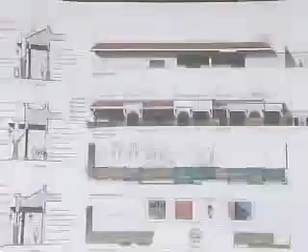Item 2, study refinement to the cornice of the parapet cap to reduce its overall overhang. Do you want to go over that? Let's see, how do we address that? Study refinements to the cornice at the parapet cap to reduce its overhang. Was this, did we make any changes to that? Did we refine that detail? We did on the construction documents, but not on this. Okay. Let me just go through all the minutes and then you can do a little presentation.

Because what we're here today for is that you're now going to have 3 tenant spaces instead of 2. That's correct. So item 2 was the cornice of the parapet cap. 3 was the height of the side openings are to match or be lowered to the front of the new entry arch elements. 4 was to study the height and color of the awnings and provide colors for the materials. 5, one board member finds that the roof over the arched entry element requires further study. 6, clarify and provide landscape details of the existing and proposed plantings for the areas shown in solid green on the plans along Milpas and Montecito Street.

So do you want to, how do you want to do your presentation?

I'll let Keith take the mic on this one, just to give you a simple overview. We had one tenant space the last time, and now we've split them into two, so we now have two entrances. And so we changed the plan.

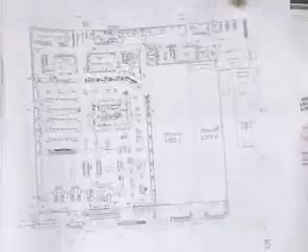Everything that was at the front, where we had at one point in time one ramp in the center, and now since we have two tenant spaces, we created a ramp in front of each one of them and added an extra arch. Actually, let me go back to this real quick.

Originally, what we presented the last time we were here was very close to this, except we had 3 arches. This being the main entry for the Fresh Market. This is our secondary entrance/exit, and this was our tenant entrance/exit.

We're trying to keep a very similar elevation, so we kept this archway. We now have 2 - we need the flexibility to have 2 tenant entry points. So these are our tenant entry points, keeping that arch.

The opposition to this would be to add 3 arches, and we want to keep as close to that original elevation because we really like that elevation. We think it works well. We've already been approved for that elevation, so that's why we came back.

The only real difference is that we've added a parapet on these 2 sides to allow an entry point here with storefront, entry point here with storefront. This archway is still at the front right here, and that's your entry point for our 2 tenant spaces.

Okay, so the archway has a wall behind it? The archway has a wall behind it. It's actually landscaping underneath, so we would have the same architectural detailing above, and we would have landscaping underneath.

The planters added then? Yeah, yeah. So this cream-colored wall that's right here is actually back at this plane? Correct, that's correct.

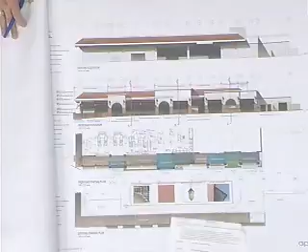And that's all. So you're right now doing construction drawings. You were given project design approval. Were you to return back to full board or consent? Do you recall? It's not noted here, so I'm going to say it was full board for your construction details.

It was my understanding that we were coming back today. We would present, hopefully get approval for the 2 additional entrances. And then we would come back a final time for full design.

Yeah, okay, it's returned back to full board. So then any of the items that are on the minutes that you haven't addressed, we'll just roll it over to the next time you come.

Now, would that be full board, like everybody today? I thought we were just going with one person. That was our understanding.

Oh, here it is. Actually, it says here, project design approval and continuance indefinite to the full board with the following comments. So really what we're going to give you discussion today is that the two entrance concept here is fine, and then we'll come back with the rest of the information.

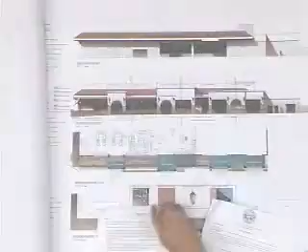Unless, have you addressed the height of the side openings and all that kind of stuff? You ready to talk about that? We did already on the CDs, not on the [elevations].

Okay, then we'll just roll those over. So we'll just talk about these two items and then move on to the next meeting. And then for the next meeting, if we need to just talk to Tony about this, we can. But I guess we just need to find out if it's contained in our construction drawings.

Do we just pull those sheets for the presentation, or do we have to actually update a rendered elevation for that meeting? I would believe construction drawings would be sufficient enough.

Okay, so with that, do you have anything else for your presentation? No, I did bring a sheet. They're not completely finished yet, but it does cut a section through here showing that this is closed off, giving you that condition of how it's closed off on the archway entrances.

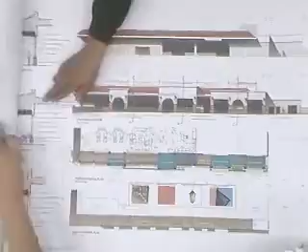One comment - how are we going to close off the return here? I would say let's just address it at the next meeting. So with that, I'll open up public comment.

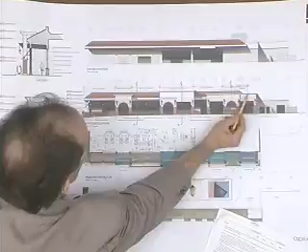Another question, Mr. Chair. This obviously returns back to the building right at the column line, and then this is also a corner of the building, is what we're seeing. That line right there is also a corner. That's correct, that's an existing stucco band. But it looks like the parapet height is slightly higher than this. Is that your intention? There's a ceramic tile band running above that stucco band, and then a cap, parapet metal cap, painted.

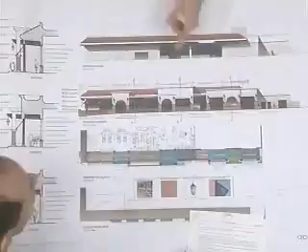I have one question. We had one board member note the same plane. Going to add to that real quick - this is that loading dock area in the back, and that's that existing corner. So that kind of shows how we're stopping a little short of that wall right there. The column sits right here, then the landscape wraps it, aligning with that edge of the building.

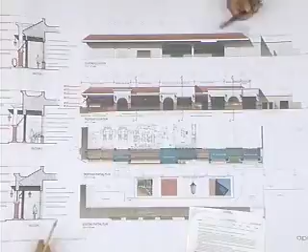I see that. And this is horizontal metal? Is that what that is? Split face CMU block. All right, and you're plastering over it, is that what that's showing? No, we're not, we're just being painted. That's just to show the paint. Okay. This is being plastered. So this would also be split face along here. That's correct, existing.

To clarify, is the elevation correct or the plan correct in your final intent? The plan is correct. Yeah, it's just this pop out - it looks like a pop out, but it's not actually popped out, it's all on one plane. So there's no line edge here. Correct, there'll be a line there just as a score line, a control joint. Oh, it's a control joint. That makes sense. But visually, you can't see a control joint from a distance - not very much, very single line.

I had a question. On the minutes, it said one board member finds the roof over the entry arch element requires further study. Did you make any changes to this arch? Was this the arch that was made reference to? It wasn't, we did not. It was this roof element, not the arch itself, that I was asking for some study. I just wanted to see if that was the only one, because I don't remember exactly what it was, but this is where you would like to take the project. Yeah, we feel just in looking at that whole composition, how the signage fits in the field, how the arch works, we really feel that this is kind of our best design. We feel very comfortable and are happy with that design.

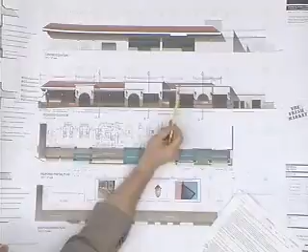For example, this one could be a little higher. Maybe this goes up just a little bit more. Maybe this comes down and this plaster meets the existing plaster height around the side. I think there's a number of options that could be considered there, to get some kind of more differentiation in terms of the overall surface and column arrangement.

This forward, that's how it's showing. I don't think that would really affect our plan if we were to do that. That's just my view. But I'd like to see the side view in order to understand exactly what's going on and how this connects with the existing building.

Those are my comments, thank you. Comments, Stephanie? I'll jump right in and say that I somewhat agree with Kirk in that I do believe there should be a change in plane at that location, and the solution you've come up with is pretty strong. However, I wouldn't encourage you to go any higher with these elements, but some sort of different treatment of them, perhaps this middle one, to differentiate it and also pull it forward would be helpful to alleviate that linearity. And I'm a little concerned about the fact that you're not treating the split face block there, or the texture of the face of the building.

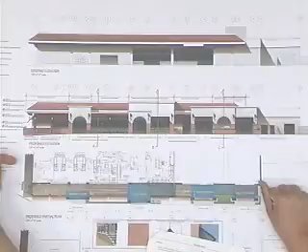Okay, and what about the side that faces Montecito Street? There's trees all around there. We're just going to paint it. Again, how you turn that corner and treat that corner will make a difference. If you stucco it here and then stop, and then it's just split face effect, that's going to be a little awkward.

So I'm just saying, come up with some solution for the next time you come before this board. Okay, that's a great comment.

Discussion from anybody else? I missed the original review, so I'm abstaining from comments.

Okay, Kip. Let's say now, I still can make comments, right? And should I limit to the front, the two elements, or should I? They're in the process of doing construction drawings for this design, so if you have anything that they can use to take this design further while they're doing the construction drawings, that's one comment. The other comment is what's in front of us today, which is these two things. They're not going to alter this design significantly, but as they refine it, you can make some comments.

The project received conceptual approval? Project design approval, yes. Which one, conceptual approval? The next one. Preliminary. It did receive preliminary. So this is final. No, this isn't final. This is in progress because they made a change to it, because they now have these two entrances. But the comment from the last meeting was to address the front. And they basically said that they're happy with the way this solution was. They studied it and they're going to stay with what they initially had.

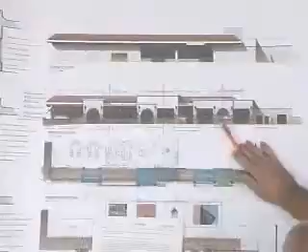I think that this element right here, which kind of looks like an entry element, is all decorative, and I think these columns are a little small width-wise for this to be the same plane, and I think it would be better if we just utilize the canopies to do it.

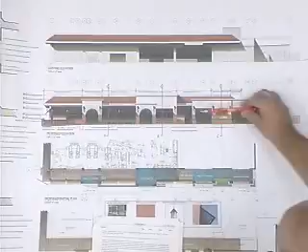Not have this thing in the center right here, and make these columns a little bit more like they're going to carry that load. That way I think the options are better, and it's not in conflict with this. So it still looks to me like there's 3 units, and they're splitting it, so it looks odd to me.

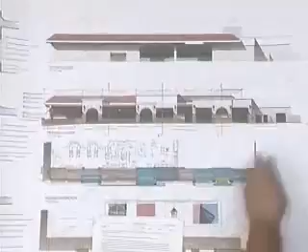And I agree with Stephanie that this trash enclosure should be plastered, as well as this wall and part of the turnaround, at least to the trash enclosure, should be plastered.

Before you talk, did you understand what Kirk was saying about varying this plane by pulling this up forward, which they agreed to, and the second thing Kirk was saying is perhaps changing this parapet or changing something here to give a little bit more variation.

I think that would also be a solution, but as it stands right now with these smaller columns on the end and the domination in the center and it being all the same plane, I'm having a lot of problems with it as it is.

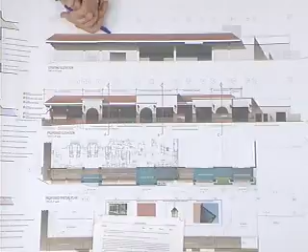So they won't be coming back with it the way it is. As a whole, I think it needs study, not just this portion of it.

Okay, Howard, did you have anything else to add? I pretty much agree with what I've heard, and also I have not seen this project before, so I'm going to abstain.

So, Tony, did you have something for us?

So Keith, do you want to add anything before we do a motion? Just real quickly, I understand what you're asking for about termination of the stucco. The one thing I wanted to point out is that this is approximately 90 feet back from this face. So I understand what you're saying, but my concern is we'd be plastering a facade that is extremely far back from the front entrance. It would be, from our perspective, a high cost for something that wouldn't have a huge architectural effect, because it's so far behind.

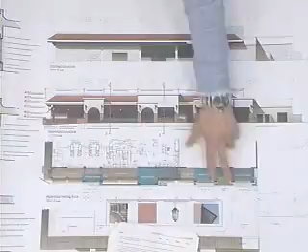The suggestion is that we need to refine this plan so that it matches, and when we come back for our final presentation, it will be changed, and we'll look at further development of that as well. And these columns here too - they could be beefed up to be as wide as they used to. They do look a little thin. That was actually a good eyesight catch.

So if someone wants to make a motion, or I'll float a motion and see if everyone's in agreement. The notes I took were for the applicant to study the new entrance elements and to vary the parapet heights and/or the facade treatment. So there's both this direction as well as this up and down stuff. We're not giving you 100% direction, but just in the sense that you need to do something here, because what you have in front of us isn't working. We have one solution that was mentioned, and then Gary was talking about some other options.

Okay. The second item was to bring some additional information about the side views and how the plaster is going to be terminated as you turn the corner. So if you're going to go 1 foot, are you going to go 10 feet, or are you going to go 90 feet? And then if you want to show some photographs from a different part of the parking lot, you can make your case.

But right now, we just don't want a clean line or look like what we didn't touch. So come back with a solution. And I would say on both sides, how the stucco over the CMU block is being terminated, and provide additional information about the side view.

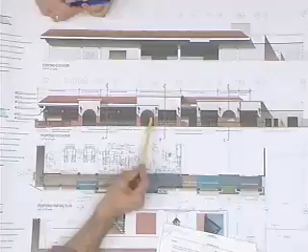Part of the reason for wanting something else done with the roof over this main entry was because, as was pointed out by Tip, the height between the top of this arch and the parapet is weak compared to what's happening here and here. So it's like you're taking the most prominent entrance and giving it a kind of weakness by doing that. I think something needs to be done there. There are lots of options, but I think we should keep that item in there.

And I want to comment on that item a little bit too, on the motion. Okay, wait one sec - why don't we just add item 5, but say two board members find - or just say some board members find that the roof overhang... I'm fine with that, keeping 5 in. Keeping 5 in, okay? And Chair, I know cost is a big issue, like everything we do in life.

Personally, I think if you get rid of that element completely, you'd have a much more successful elevation, so you're not conflicting the front and the back. I think maybe you tried too hard on that front. So just look at that and see how it looks.

Did you mention thickening up the columns? No, but I'm hoping he'll remember. Let's add that to the motion. Item 4 would be to have the column width match throughout the front elevation on the new tenant spaces - which he's taking good notes on. Any other discussions?

Before we take a vote, one comment: when you come back, don't come with 100% finished construction drawings. Come back with an in-progress set in case there are a couple more tweaks, and then we'll have you go to consent, which is the final version. But if you have all your engineering and everything 100% finished and we ask for minor changes, it might cause some heartache. So just make sure all the details included on the elevations are included in your set.

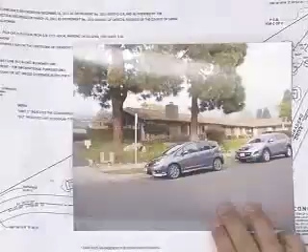I've taken perspective photos from the side, and there should be some close-up photos of the damage. So we're just looking for the photo of the existing condition, and then we'll look at a photo of the proposed solution. Here's one from across the street, and here's another from a different angle, and another. I want to keep them all so the TV camera can zoom in, and then I'll pass them around to people. Oh, I'm sorry, got it.

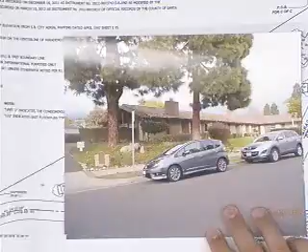But we're talking about this area right here, where this trellis is. Is that what we're talking about? Correct. So here's another view of it. It's the trellis at the end of the rake. Correct.

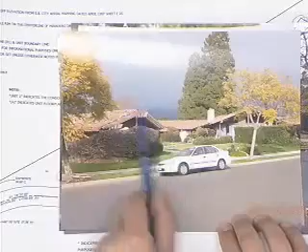This is a good photo here. You have a good photo? Okay, so this is the current exterior condition. Correct. So you pass these down, look at them, and then pass them down. And how would you like to proceed?

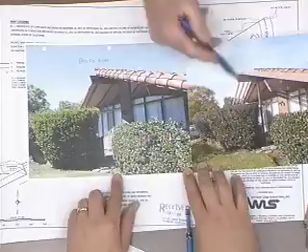What's the proposed solution? You had a mock-up. The proposal is we have some photos -- no, that's what we would propose the final look to be. What we're proposing is removing all the trellis members themselves, cutting back the 3 support beams at the end to about 8 inches from the rake, and then putting a metal cap back over that exposed 8-inch top, eliminating the trellis members and the exposed beams.

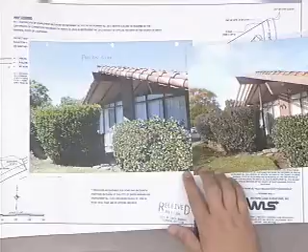The letter is rather verbose, but 6 years ago we spent over $100,000 refurbishing these trellises, and we're back in the same boat again with dry rot and termite damage. The community has voted not to spend the money to replace them all. We gave them the option to take them all down, and the vote was essentially to remove them. So what we're proposing is to do that on behalf of the association. All righty.

That's all from the presentation. It sounds good.

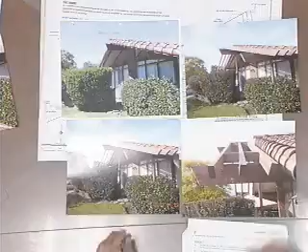Okay, and what is the relationship once the beam is cut to where that column hits the beam? Is it right at the end, or is it held back a little bit? The supporting beam will be back a little bit - we're going to leave 8 inches at the top of the column support beam. Okay, and then cut at a 30-degree angle, and then this 4x4 that supports it will be back just a few inches behind it, 3 or 4 inches at the most. That's all, yes.

Okay, I got it. Sorry, go ahead, whoever wants to be next. I have some questions. Are these 4x4 posts part of the original design?

Or were they put in there because the ridge beams were sagging? No, they were not put in there because the ridge beams were sagging - those are the original design ridge beams. So the ridge beam, this is a fairly deep beam, is cantilevered quite a ways out. Yes, and it was intended to do that without any support. No, those were original design. It was determined which ones were so far out that they structurally needed support.

On some of the units it was determined there is not enough weight on that cantilever, so they did not need the beams. So here's another little technical question - does the association own these pieces of wood, or does the individual condominium owner not own these? Correct. So the letters came from a condominium owner, and that person said there were a lot of people who were concerned about this, that it would change the look of the complex from what it is to a new look. Yes, it will - that's why we took a vote. Right, we actually had a vote.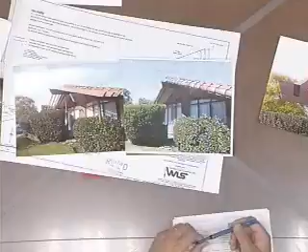So, cutting this off altogether on the north side of a structure, one of these buildings - might that offer more light into these units? I'm not sure where the person is who lives in this complex, which side they're facing. If the reason you're going to extend it is because you really do like the shade this provides the condominiums, or is it simply a maintenance issue?

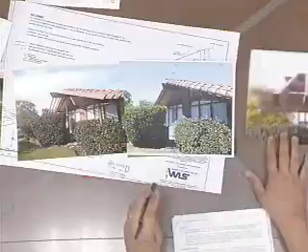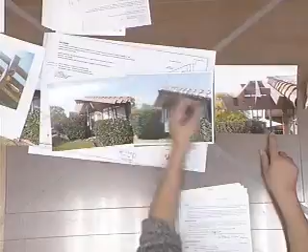I think I want to answer the question. I believe our proposal is he's cutting all of this off to this point, and where this column exists he will keep it, but this column doesn't exist on all of them - this trellis is coming off on all of them. Oh, I thought they were going to take the trellis off but put tile over it. No, you're not - he's just going to wrap the tile like it is here, using 8 inches and a 30-degree angle, so that little look, and then this middle cap will be placed back over here.

All of the overhangs will be significantly reduced, uniformly throughout the complex. Yeah, exactly, and three of them already have those off.

Was this picture the one, or do we have... no, this is a Photoshop thing. Okay, yeah, three don't have it.

So what, are we cutting these off and moving this over? We're cutting this off, cutting that, and that's all. It would look similar to this. And as long as the column remains, the column will remain. Correct, because we don't want the whole thing to come back. Most of them don't have those columns, some have it and some don't, but where it exists, they'll keep it.

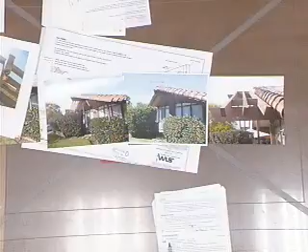So let's go to comments from the board members in any particular order. Scott, you're first. I look at a project like this, and I'm picturing it without the trellis. I think, is it an approvable project without the trellis? Is there enough architectural interest and character to approve it?

They're very simple buildings, and the trellis does add some architectural detail, but there is a lot of character in the buildings nonetheless. The roof has a great patina, the landscaping is very mature. I think there's enough interest there that the building can stand on its own without the trellis.

My only concern is the issue where the column exists and you're cutting the support beam back to a stubby little nose, and that's kind of a difficult condition. I think you need eight inches, perhaps minimum, of overhang at the column.

Just an interesting point. Now, I'm sorry, that's not for me to talk. It wasn't, but if you can be really brief, what he was talking about was the distance right here.

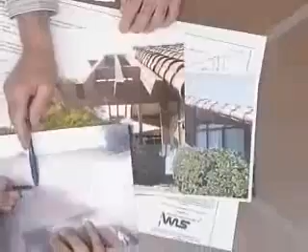There we go. Then we have those holes or whatever damage is left under there that we could fill. So eight inches is not set in concrete. We wanted to leave something because we suspect we're going to have damage in the future again from those things being exposed, so we'll end up just nipping back.

And perhaps you need a good copper cap and some epoxy filling. He said metal cap -- we're going to put a metal cap over it.

So let's go back to comments. Anything else? Those are my comments. Okay, great, anybody else? I pretty much agree with Scott.

I'm sorry to lose the trellis overhang because it really is part of the character of the development. I do understand that this is a maintenance problem. I wish there was money in the budget to properly maintain it. But I have to agree that the building will still have architectural merit.

And I do agree that the distance between the post and the rake at the end of each of those beams will be important. May have to move the post or maybe cut the end of the beam out. And to save yourself this problem in the future, just cap the whole thing -- cap the top, the end, everything. But that would be my comment.

Okay, great, any other comments from anybody else? Yes, Kit.

By the way, Mr. Miller, I read your letter and I really feel the pain of your association. I just spent $100,000 to maintain these trellises here, and personally, to me, I think they are an eyesore. They are an eyesore now, they were an eyesore initially in the new design. I love trellises, but I don't think they do anything -- they don't shade anything, they're just out there for no reason. So I'm really glad that you finally cut them off and clear them up, and I think we have a much better project at the end.

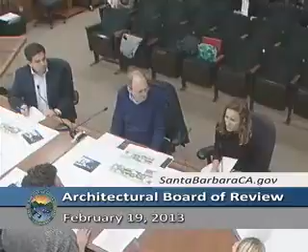The minutes from the previous meeting were... If you want to go through your presentation, or do you want me to go through the minutes? I think we can just go ahead and go through the presentation, because we actually do try to address the minutes point by point.

Just as an introduction for those who may be new to the project, in the audience and on television, I want to say a little about the background. This is an affordable housing project, ownership affordable to moderate income residents of Santa Barbara and workers in Santa Barbara. Primarily the kinds of workers who may be interested in living in this small development would be workers in the medical industry and at Cottage Hospital, that kind of individual.

I want to emphasize again that this is an infill project on property zoned R3, multiple family dwellings, and it's bounded on both sides by apartment buildings that are 6 units and 10 units respectively.

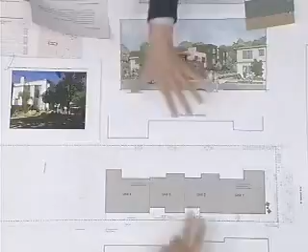We're proposing 4 units on a good-sized lot, as you can see, that has Mission Creek at the back of it. The buildings are moved towards the street and maintain a 25-foot setback from the top of the bank of Mission Creek. The overall density with the 4 units on this lot is about 11.76 units per acre, so it's hardly a high-density development. We do have three stories of building in the center of the building that you see in front, the 4 units.

As you know, the SD2 overlay zone permits 3-story structures within that zone district. However, there's a limitation on any 3-story elements: it's limited to 50% of the ground level area. Our 3rd-story elements, which consist of some bedrooms up over the central portion of the building, are less than the 50% prescribed.

One other point I'll reiterate from the last meeting is that we are asking for one modification, having to do with the setbacks. In the SD2 overlay zone, there's a setback requirement of 10 feet for 1-story buildings and 15 feet for 2-story buildings. In this instance, if you look at the pattern of development on the street, the typical setback for the 2-story apartment buildings on either side and all around the area—you have an aerial photo that shows some of that development pattern—is typically 10 feet.

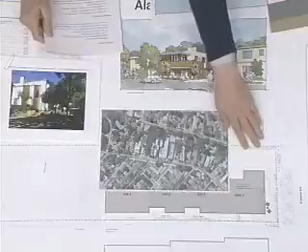In this instance, we have designed the building, and you can actually see it in this rendering, such that we cut away an area of a 2nd-story mass to create a deck. So the only part that's really subject to this particular modification is this little hatched area you can see on the site plan. That's the only area that actually moves to the 10-foot setback consistent with the rest of the neighborhood.

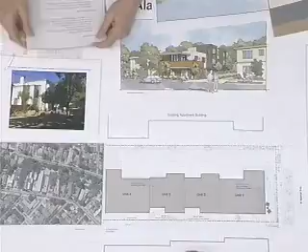Since the last meeting, we've done a little more work here. One of the comments we responded to—first, we wanted to create a 3-dimensional view, so you have a rendered view, and you can see we've done some work with the colors. I have a couple of variants to show you as well when we get to that, which you might consider as we discuss colors. But the main change we made to the building design itself is adding another material element.

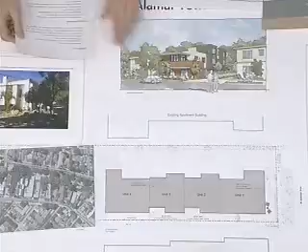You can see that here with the horizontal siding, which would be a cement fiber type board that clads and wraps around the front element, and then we use it again at these spandrel panels in the center of the building, and at the other end of the building we also have a wall that utilizes that material. Another thing we did is add a little additional overhang at the front, to the second-story roof. I think that adds a nice, deeper shadow line, and that was a good suggestion, a good improvement.

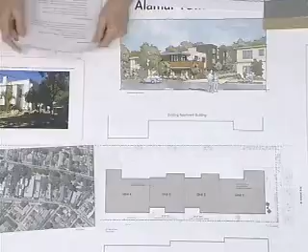What else have we done here? With respect to the windows, we understand you're not happy about using vinyl windows, so we've changed the windows to fiberglass with a pre-finished manufactured color. And then we selected our color to use in the overall color scheme.

And then there was a comment about why we were using some double hung windows, and we've replaced those with casement windows as well. One other comment was a question about what we're doing with HVAC equipment, and we've eliminated that from the plan altogether. We really don't see that we're going to be using air conditioning here at all.

So the only other thing before we finish, I wanted to give Bill McReynolds an opportunity to talk about the photos he has taken of the neighborhood and presented to you here. I believe from the last meeting there was a request for some additional photography. So there's 3 sets, each team has one.

In terms of the existing 3-story structure in the neighborhood, about 600 feet down, there's 3 pictures there. And then from the 2 adjoining apartments, I took pictures of the 10-plex building, which you have before you, kind of what they see existing. And then again on the other side, from the 6-plex apartment building. They're just in different sets there.

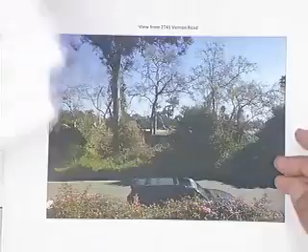Bill, this is the 6-unit apartment next door, is that correct? That's the house, that's the actual subject view house. The request was for the yes, from the 6-unit apartment.

Okay, sorry. So do you want to finish up? Finish up, and then we want some landscaping.

So with regard to the architecture, I just wanted to say something about the contemporary design style. I think there's a place in Santa Barbara for an opportunity to do a contemporary style building. We have some great examples of contemporary buildings in different locations in the city. This is certainly a location with a very eclectic mix of buildings, although further into the neighborhoods we have more single-family residences and more traditional styles. But right on this block and surrounding this building and across from it, we have these multiple-unit apartment buildings that are perhaps not classic examples of modern architecture, but they are certainly contemporary, simple design style. So we felt this is a location where it's appropriate to consider a contemporary style building, and the people we think will be interested in this are going to be younger professionals who are looking for a fresher, more vital look.

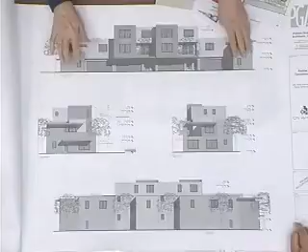So then you have this third story. This is a cantilevered section that's cantilevered about 5 feet out over the garage, and then the middle sections are cantilevered about 2 feet, I believe. And then at the back, once again, you have the main living on the ground floor with the bedrooms on the second level, and the mass modulates and steps back down towards the creek.

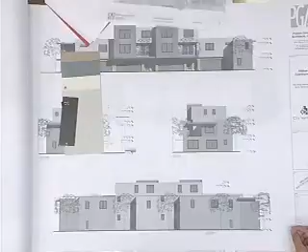So with respect to colors, we've come up with a couple of different schemes. This is the scheme featured on the cover page, and it takes that third story mass and uses this darker blue-green color, with the siding in a kind of wood-shaded color, with a couple of off-white and a warm gray.

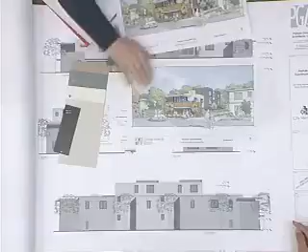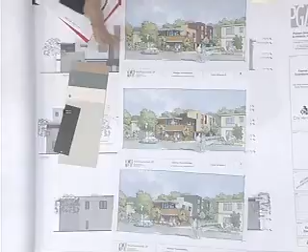And then we look at another couple of schemes here. Both of these use the same basic color palette, but we move the locations of the colors around a bit, moving from a darker 3-story portion to a lighter one, and switching to the darker color on the 2-story mass. So those are just a couple of different schemes you can give us feedback on what you prefer.

One comment I want to follow up on from the minutes: it said to study extending the depth of the eave elements and provide additional eave elements, particularly on the south side and other areas, to create additional shade lines and character to the building. Character-building elements would be variations to the second and third story roof heights and variations in windows or fenestration. We didn't get a chance to edit that, so it's a bit of a run-on sentence.

I wanted you to briefly say how you evaluated the massing. We took the initiative to change the roof overhangs at the front and the back. I think it's pretty obvious that the roof heights are modulated here. We didn't see much opportunity to add additional overhangs without really changing the building, although if the board feels strongly about it, we could consider adding something here.

So, want to look at the landscape plan? Sure, it's one back.

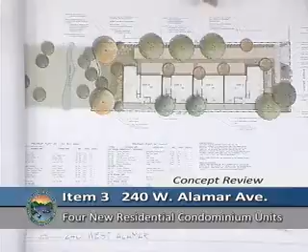At the last presentation, there were comments about incorporating fruit trees and espaliers into the project. I evaluated possible locations for espaliers on the walls, and we're pretty much limited to here, since the architecture did such a good job with windows and modulation that this is really the only blank wall available. We will incorporate vines through the project as well. As for fruit trees, all of these small orange-colored trees have the option of being citrus, and we've listed the improved Meyer lemon.

There was also a comment about incorporating oaks throughout the project. All of these smaller symbols are the 15-gallon saplings required by the city as mitigation for removing the small oak existing on the property. We've also incorporated the option of including oaks here and here, and the street tree within the parkway is required to be an oak.

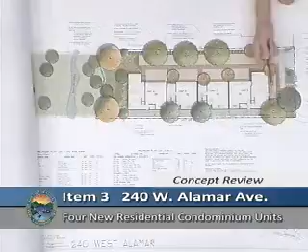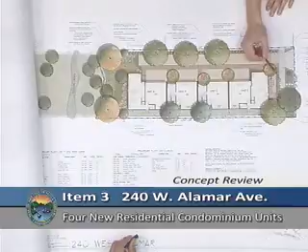I worked with the colors a little, and I feel this feels a lot better than the last plan. We also changed the ramp configuration, so that's a lot cleaner now. There's a small gate that opens this way, allowing more planting in front of the low courtyard wall. Instead of the switchback we had before, it's a slow ramp up to the front door, and they still have a small patio space.

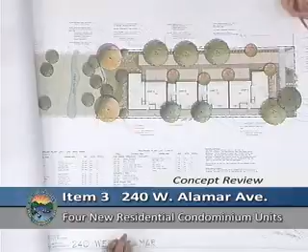The last thing we changed was to incorporate pedestrian wayfinding through the driveway. We'd like to still use concrete, but with a contrasting color and texture—maybe a heavy seed, some kind of stamp, or just a textural difference that gives it a sense of 'this is the way to go.' We'll use tans and browns, the Santa Barbara traditional colors for the concrete.

Anything else to your presentation? That's it, I think that's it.

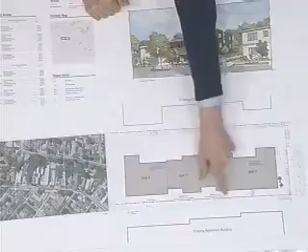So unit number 1 has a private little patio in the front yard there, but also a side yard of 6 feet. But primarily the larger outdoor living space is on the second floor in this deck here. Same thing applies to unit 4, so you have the 6-foot side yard and then a substantial deck on the second story. For these units, you have an enlarged ground level space that's 10 feet, looks like about 12 feet or so, as well as a portion of it being the 6-foot side yard setback there as well.

So the private outdoor living space is in conjunction with the garage and the stairwell. There's, let's go to the floor - that's in the middle units. Yes, in addition to the deck space. In addition to that, the middle units also have a balcony overlooking the driveway. Yes, right, private outdoor living. Okay, correct.

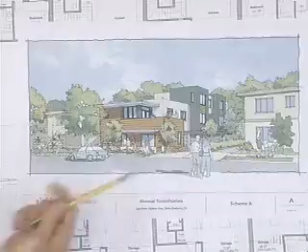I noticed on the rendering it looks like, in addition to the siding, you've got a kind of plaster detail at the window. I'm just curious what that's going to look like. It didn't look like it was differentiated yet on the plan—is it a pop out, a recess, or just a change in material?

Yeah, just a change in material. There'll be a little bit of a recess there. It doesn't really show up in the plans because it hasn't been detailed to that level yet. But the idea is that this window and the structure around it is meant to be a differentiated piece that sits within that plane. That's the idea behind it.

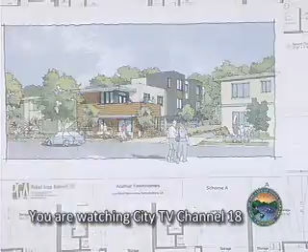And then I think last time you pointed out that the eaves are plaster and there's a metal fascia. Yes, and the underside—it looks like you're proposing that light lime color, or what do you have? Yeah, we're kind of still debating that, but the idea is that it would be a lighter color on the underside there.

Okay, and then this looks like another color. This would again be this. Oh, it's the lime. Yeah. Okay, and the garage door is painted the same. Yeah. And then also it looks like—

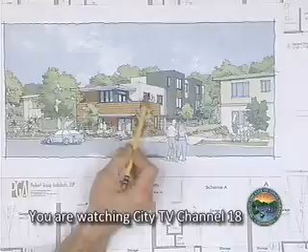except, or maybe in addition to, there's some kind of recess there at the windows. Is that a plaster return with the window recessed? Right, the windows will be recessed. The walls are 2x6, so it gives us the opportunity, by pushing the window right in on the inside there, to have the plaster return and get a sense of a recess.

And how would that work where there's siding there? Would it be something different? In those cases, we're going to have a very thin trim piece that surrounds those windows as well as the corners. Okay.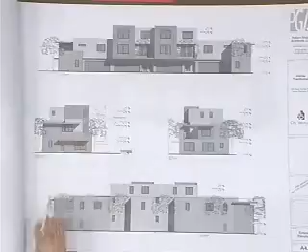I was just—one of my comments last time was my concern about the impacts on both sides to the current residents of the apartment buildings. On this side, because of the driveway and lots of differentiation in the articulation of the architecture, I think it's working fine. On this side, I still have a concern, and what I was just noticing—this is a question—is that there's a stairwell going from the second to the third floor in here.

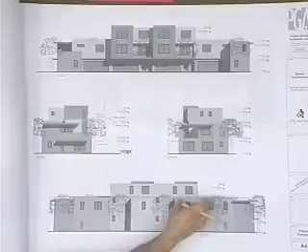That means that perhaps there could be a break in that third-story roof in a couple locations. I think there's another one happening here. So I'm wondering if there's some reason we can't do that, and also whether we couldn't do something like a projected eave on this, or some of these two-story areas, to get more happening on that side. I think those are things we could look at for sure.

All right, I think those are my questions. Thanks. All right, who wants to jump in next?

No, we are still in questions, and then before we go into comments I've got a couple things to add. A couple of questions. One, the plate height—what are the plate heights of the first, second? Nine, nine, and eight. So nine, nine, and eight.

Okay, and then in the front yard setback, how much of that front eave is closer than the 10 feet? How big is that eave? You mean that little projection that comes out? I believe it's not grounded, right—it's just a projection coming up from the wall. I believe it's 3 feet, that's a 3-foot projection.

And that is not included in the modification? No, because it's allowable. I noticed it's not in that hatched area. No, it's not—it's allowable. You're allowed to have projections of eaves into the setback.

Okay, so on the first floor, Gary, it's 3 foot 2 inches, if I'm getting this right, and then on the second floor it's 2 foot 7. All right.

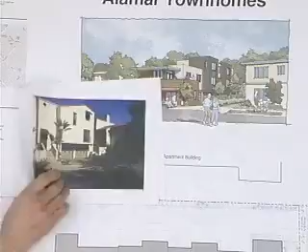And I just wanted to also point out that, because we had public comment to the contrary, that as was presented, this is 600 feet away at the corner of Talon Road and Alamar, and you have three-story facades that are just visible from the street, directly visible from the street. This looks like it's maybe 15 feet back, and that's a three-story wall going straight up, unarticulated. So this is not setting a precedent. There are precedents already in the neighborhood.

So, the way that it's been carefully designed, I'm completely in favor of the modification. I think it's clear that on both sides of this property we have two-story flat facades, apartment buildings that go up, that are 10 feet away from the property line. And this has a much more modest second-story element that's very nicely detailed at the second floor. So to me, the modification is completely appropriate.

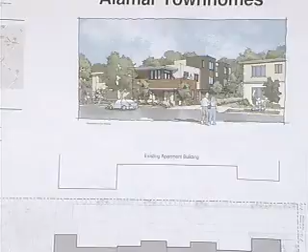Just as a general comment, this is more of a detail thing. From the rendering, it looks like the base of the building is a darker color, and I think that works well as a kind of underlying base for the building. I think also that the eaves, perhaps, should be a darker color rather than a lighter color. Just something to throw out there and maybe look at. Those are my comments.

Stephanie, broad brush.

Broad brush is that I'm kind of agreeing with Kirk, in that the way this building steps up from the street goes a long way to camouflage its height and mass, bulk, and scale. And looking at the site plan, it really fits almost similar to the buildings on each side of it, in a similar way, and within its own property line. There's enough space around it to make it a comfortable siting of this building.

For me, I appreciate the use of the siding along the front facade, and would agree with Kirk on the colors. I really love the green color, and I did not like the other colors proposed. I think it's very much in keeping with the character of the neighborhood, and would encourage the applicant to look for more ways to incorporate craftsman details into the building to warm it up, with perhaps some texture on the eaves. Kirk was saying a color on the underside of the eaves, but perhaps a texture as well. That's it.

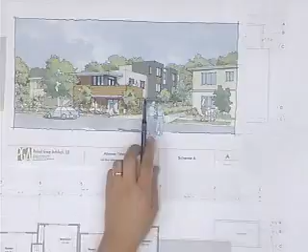The one thing about the size, bulk, and scale that bothers me the most, and it's just more of a visual thing, is trying to understand what this 5-foot cantilever is going to be like when it's 2 stories up. I'm looking at the table length here, and this is about 42 inches between me and you, maybe 4 feet, 48 inches. A 5-foot cantilever, and then the second and third floor going straight up, just seems to me too tall of a mass on top of the garage. I looked at the photograph of this other 3-story building, and it seemed, I'm not sure what this overhang is, whether it's more like a 2-foot overhang versus a 5-foot overhang. So that's where I'm starting with size, bulk, and scale visually, trying to relate to this comment that I'm thinking this sticks out too much.

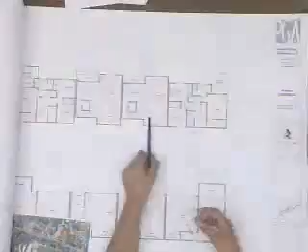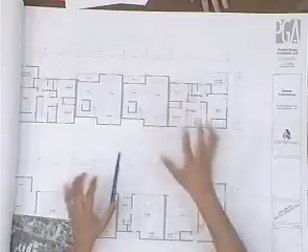Staring at the floor plan, what this zone is, this 5 feet, is just extra living space, and you've got a kitchen here, and this is a modest, affordable housing project. You've got the dining room here. There's room that this square footage isn't required to make the house work. It isn't like it's the extra bedroom or the closet for the bedroom. Bedrooms up above, though. Exactly. So I'm saying this doesn't need to be here, and that's going to alleviate a lot of that looming mass. Because yeah, it's 9 feet up, but it's taken 5 feet out from the ground.

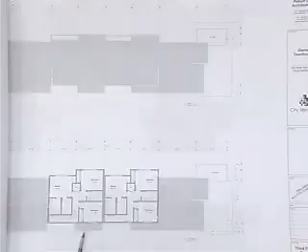And then the coloring of the thing, thank goodness it's not black anymore. But still, the green here, I mean that's a nicer green than this, but the Lego block that's plopped there seems very heavy. Visually, size, bulk, and scale, from my perspective as an architect, it's not working. Everyone's commenting about the architecture and the playfulness. On the upper floor, what I'm sensing, I know you're trying to do your demising walls, but goodness gracious, if that could just rotate over here, you could have a little bit more relief. I'm just sensing it's overhanging too strong. The other thing I sense has to do with the architectural character.

I see this as kind of a modified Frank Lloyd Wright-ish kind of stuff, or it's got a certain look. This has a certain look, and they're not the same. Kirk keeps mentioning add more overhangs and try to bring some of this character and articulation somewhere else, but somehow this is too boxy, blocky, Irving Gill here, and then this is Frank Lloyd Wright horizontal with overhangs. It's like this was an addition to this structure.

So that's my point coming from size, bulk, and scale - it still appears large on the site. The character of the architecture, as long as it was homogeneous and had a flavor - you've got the 1950s modern, whatever they call it these days, you have a choice - but these two are separate from tying it together. That's visually just how I perceive it. So architectural style and size, bulk, and scale, I'm not seeing it yet. The third story element is not a problem as long as the massing can get rotated or lessened, but that overhang is bothersome.

So at that point, how do we proceed, and where would you like to go next? I think at this point we will probably have an indefinite continuance because we're going to get feedback on the PRT, and then we may go forward to the zoning administrator hearing with your comments, and so when we come back, we'll have refinements and kind of incorporate some of the ideas that you brought up.

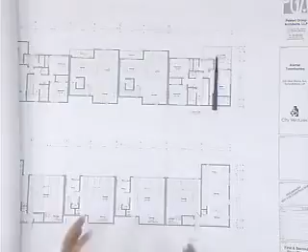So what we can do, I asked for comments broad brush, if we can just quickly go through and comment about the requested modification so we can have that in the minutes so he can go on to the staff hearing officer about this one element. I'll add my comment that visually we're supposed to look at the aesthetic impacts. Because there's a negative space here, this encroachment over here I want to say basically balances, plus the way that architecture works with the horizontals. I'm not losing sleep over the aesthetics of this requested modification, and it's because of the negative space that's next to it. But if other people want to chime in, we can add that to the motion.

Excuse me, Mr. Chair. For projects that go on for a land use approval at Planning Commission or Staff Hearing Officer, we ask you to do the project compatibility analysis in the minutes. Well, I don't think we're ready for that at this point. I don't think so either. So then you won't be able to go on to the Staff Hearing Officer to address this issue until after you get your creek and your DART taken care of.

So scratch all that unless, for the record, if people want to just comment on what they feel for the requested mod - Kirk already has and he's in favor of it. Correct? Yes, I'm in favor of the mod. Okay, I'm not in favor of the mod. I think it is too close, and with the eaves, as I said before, I think it's just too close in the outdoor living space. I think it's too close to the front. I don't think there's a need for the mod.

Okay, perfect. So now, how would... I'm just going to say 3-2. We don't need to take a straw vote, we just have the feeling of the board. So if we can tidy this up and just make it an indefinite continuance with the comments from the board. And that's appropriate. We'll come back with Mr. Chair - I think it seems like it would be helpful to the architect if he had a better sense of the consensus of the board regarding the cantilevers. If he's not able to do those cantilevers, that would make a big difference.

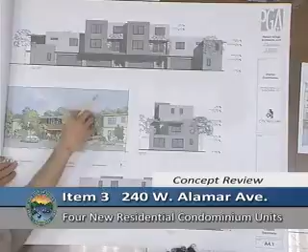I don't have a problem with cantilever either. I just want to add one other thing, because I really appreciate Paul's comment that if even some modest addition, like little pop-out eaves, was added to help tie these two together, I think that would really help. I think that's a great suggestion.

So who would like to formulate a motion? Could I get an idea of how the board feels, a straw vote on the size, bulk, and scale? Because I think a number of us still feel the project is large. What did Tip say? Tip is fine with it, so I'll just say it's 3-3. We're split down the middle.

Unless you want a formal straw vote, I think it's fair to say some members of the board feel the overhang is okay and some are not, but it's a divided board. On the overhang there's less concern, but on size, bulk, and scale, it's divided.

I think your comments about the style, the fact there are two different styles playing with each other—I don't know if that's a good thing, if it's eclectic, or if it should be made one or the other. The comment is valid. I think the discussion they had about adding to it is a good comment. I agree with your comment on that, Paul. I didn't see it, but thanks for pointing that out.

I think what we really need to concentrate on is the big picture, and the big picture is the size, bulk, and scale of the building. At 3-3, it means to me it's not there yet. I would say some board members have a concern about size, bulk, and scale. Let's leave it as some, but in reality it's a 50-50 split.

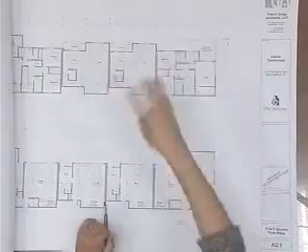We're having a good discussion here. Howard's point of view is that this space, 10 by 10, is not really part of the everyday living space. Whereas this space over here, off the kitchen, you can actually do stuff on that outdoor space. Here, yes, they provided it and statistically it meets the requirement, but if they had more of an outdoor space here, or even on the third floor, related to some living area, they would go out there and use that balcony more readily than having this space that's just going to store bikes and trash in the back—it's a dog run. That's where his concerns were coming from when he's studying this. He's saying, if I own this unit, I wouldn't be using this space that much.

So if we can just say, look for opportunities to provide more outdoor living space connected to the homes, to the living areas of the home. All right, okay.

Any other discussions on the motion? I have one minor disclaimer—everything was fine with it, I'm just not okay with the color shown on this rendering because it seems too heavy and too dark.

Well, this is the color. I know it is, and that seems even lighter. This seems pretty close to that. No, this is a lot darker. No, this seems pretty close to that, different printers though. This is the actual color we're proposing. Yeah, good, and I think that's pretty close. That's pretty close. Is that still a problem? I'm just, it's the heaviness, but we'll go on.

All right, we'll have more opportunity to get into color as we go down the road. Any other discussion on the motion? We'll call for a vote. All in favor? Aye. Opposed?